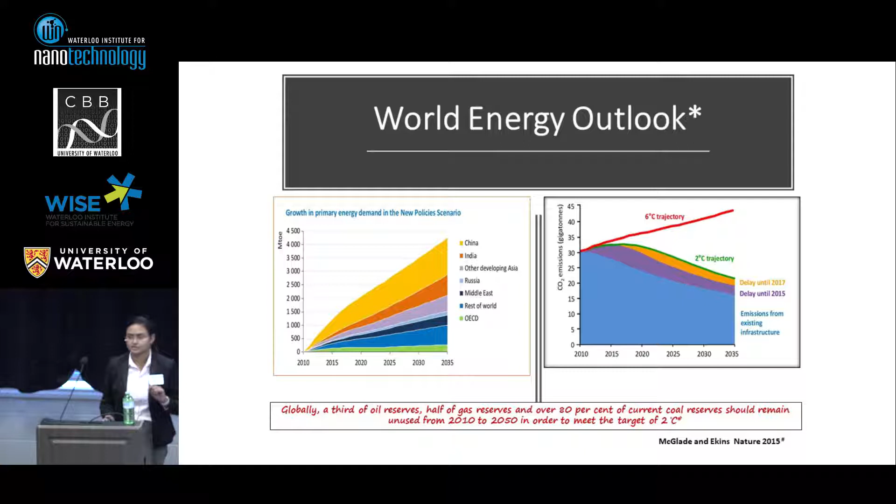And there's another trajectory which is 2 degrees Celsius, and if we follow that path, the Earth's temperature will increase by 2. But we already crossed that limit by 2017, and we're already on the trajectory of a 6 degree increase in global temperature. So considering those situations, we have high energy demand, CO2 emission, and waste generation, and all these 3 parameters are making the whole Earth so unsustainable. So to maintain environmental sustainability, we need 3 aspects.

One is renewable energy, zero carbon footprint, and the third one is to remediate our waste. All these things motivated me to work on the bioenergy process.

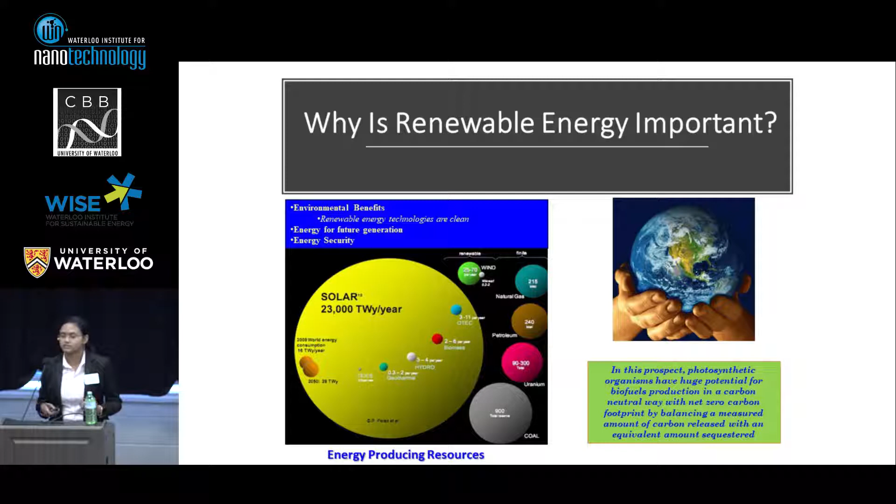If we look at all the energy available to the Earth's atmosphere, solar energy is vast in comparison to all renewable and non-renewable resources. Even if we stop using our coal reserves by 80% from now onwards, we still would not be able to meet the trajectory of only a 2 degree increment.

So why did I start my research with solar energy and photosynthesis? Because photosynthesis is the only process which brings energy to the biosphere, and this is the starting point.

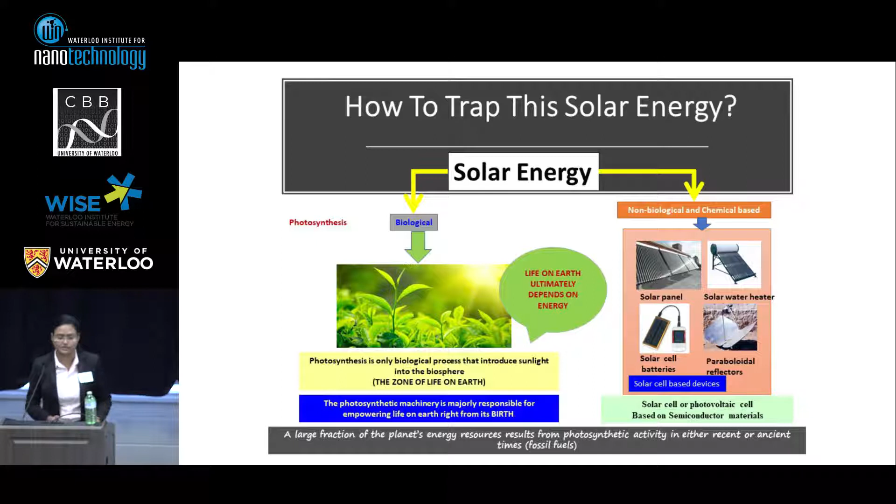Considering that point, I worked on three energy aspects: one is hydrogen production, second is bioelectricity generation, and third is biodiesel production from algal biocells, using energy from solar radiation, biomass, wastewater, and finally CO2 as a carbon source.

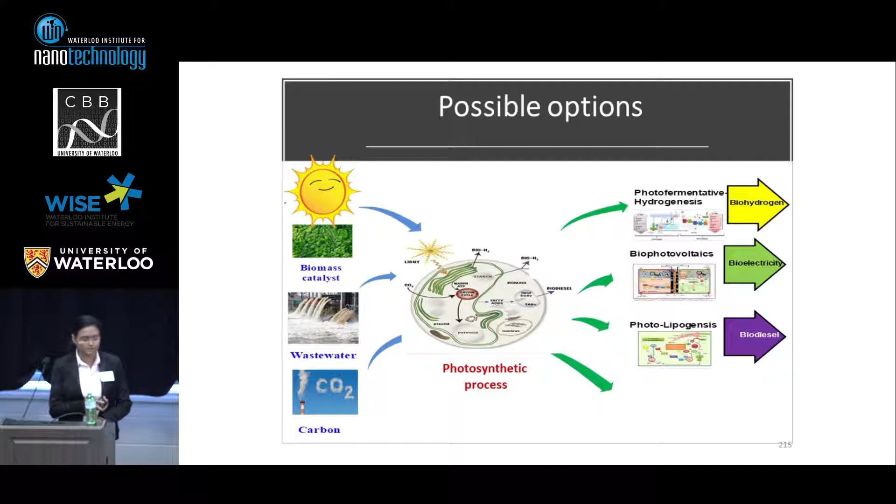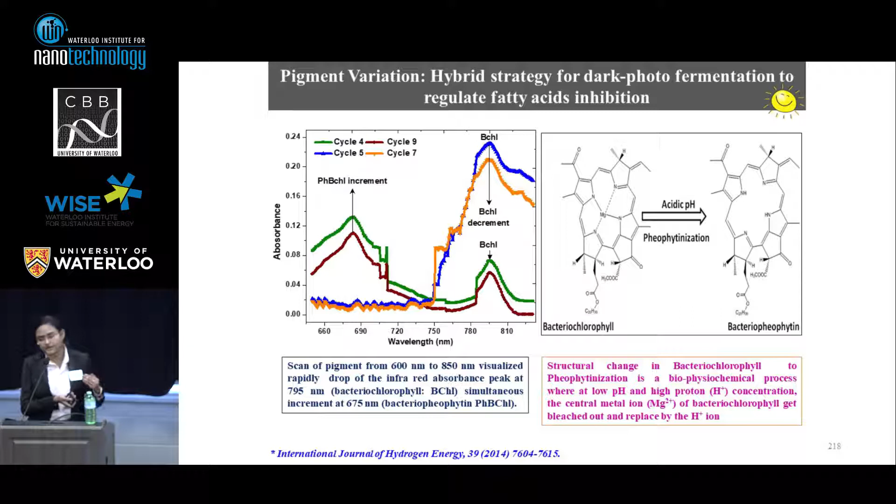We then found some issues, like hydrogen production was depleted, which was because of the pheophytinization of these photosynthetic pigments. We later recovered this by adding more photosynthetic bacteria, which was because of the acidification of these pigments — the metal ion at the center of these bacteriochlorophylls gets replaced by a hydrogen ion because of the acidity.

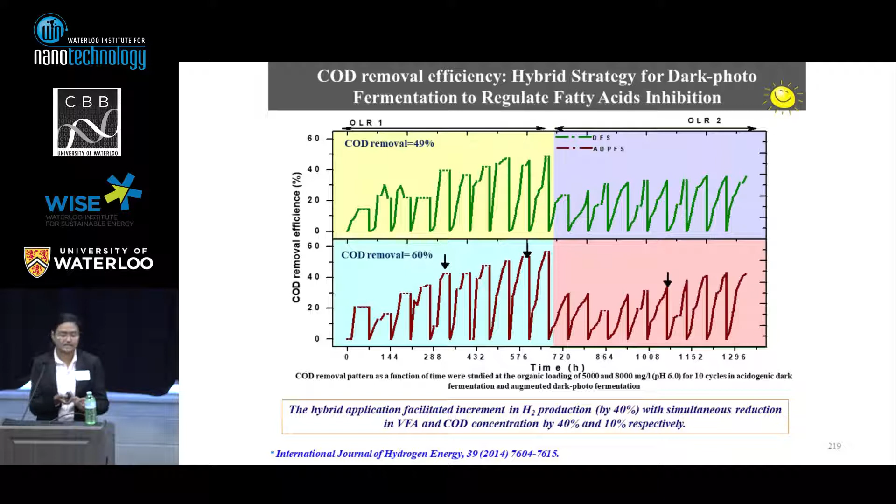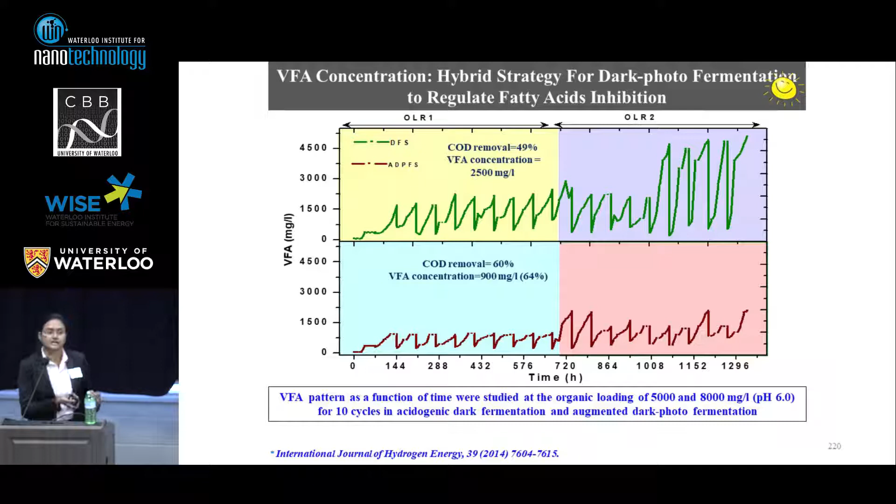We also looked at the COD removal efficiency, which was not enhanced that much — in the normal system it was 49%, and in the augmented system it was 60%. But when we looked at the VFA, volatile fatty acid concentration decreased to a higher extent, meaning the photosynthetic bacteria were utilizing these VFAs and producing more hydrogen.

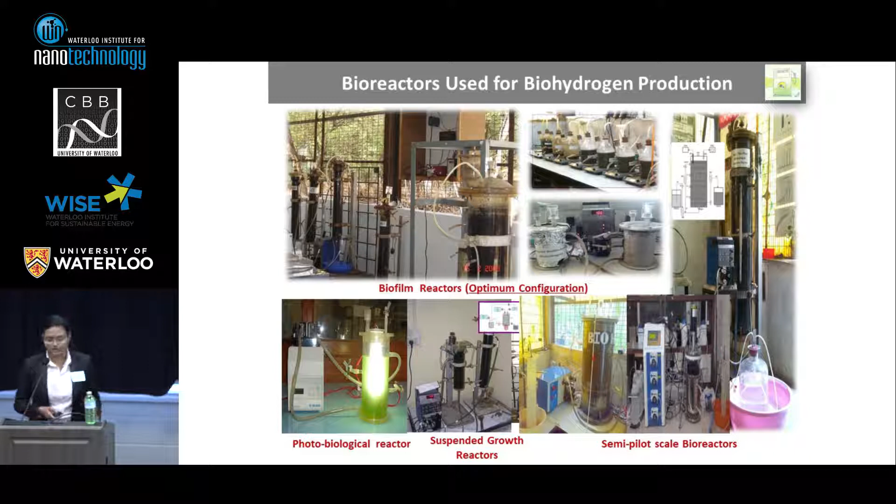These are the various reactors which I studied, starting from bench scale to semi-pilot scale. I want to show this reactor, which is the outcome of 10 years of study, where we established a pilot plant operation using food waste, already installed at CSIR-IICT.

It is a two-stage process: one is acidogenic fermentation followed by the methanogenic process, and third, we have an aerobic treatment plant where we treat the wastewater to a higher extent, integrated also with bioplastic production.

In the first part is the hydrogen reactor — first the equalization tank where we collect all the wastewater, then we send it to the hydrogen bioreactor at a pH of 6, which is the optimal pH for efficient hydrogen production. We collect the hydrogen and use CO2 scrubbers, basically KOH solutions, to isolate the hydrogen gas from the CO2.

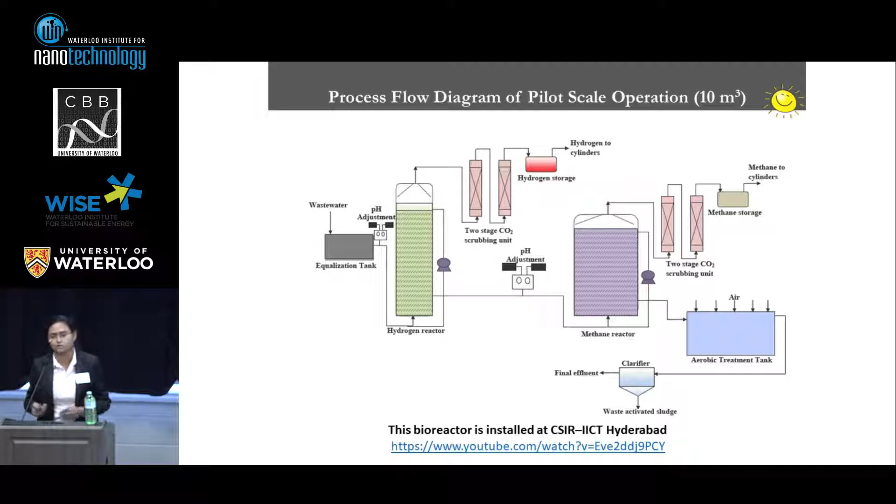We then pump the effluent to the methane producing bioreactors, where we recover methane and treat the wastewater further, before the whole wastewater goes to a settling tank for further treatment. This is a mature technology already installed.

My next setup was a photosynthetic microbial fuel cell operation. First I'll give a brief on how it works — there are two chambers, one is the anode and the other is the cathode.

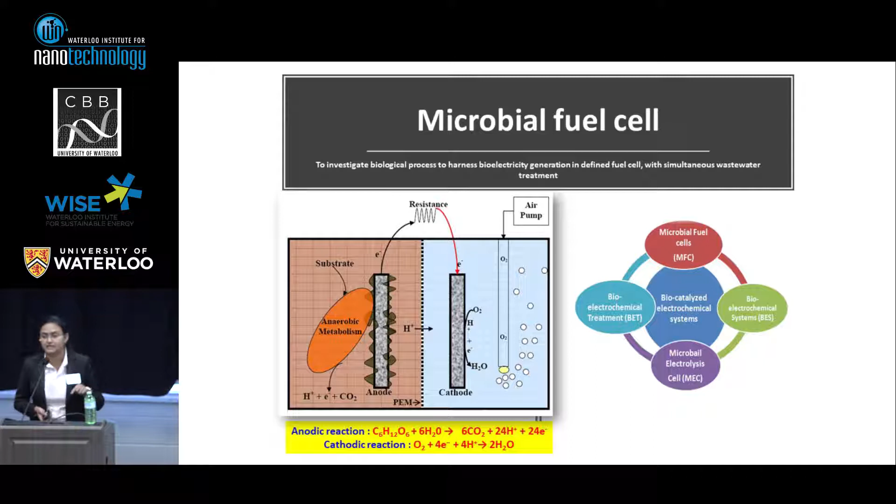In the anode, we put the wastewater, and in the cathode we pump in oxygen as a terminal electron acceptor. In the anodic chamber, there is a bacterial population which consumes all the organic content in the wastewater and converts it into electrons and protons. The electron gets captured by the electrode and the proton travels to the cathode through the proton exchange membrane, and during that process we build up a potential difference, which creates electricity.

This is a simple setup showing how a bench scale reactor looks. We worked on a sandwich model — the top is the cathode, the bottom is the anode, and in between the PEM is sandwiched.

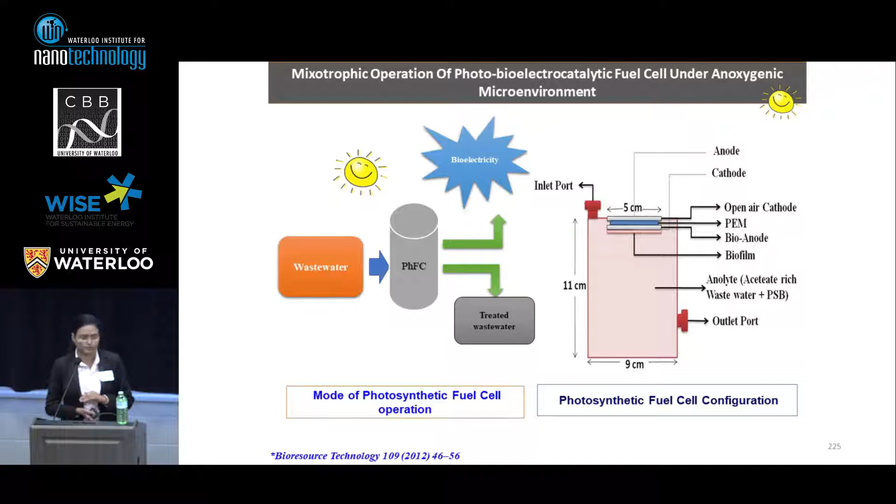This was the first study where we studied how the current and open circuit potentials were varying. This was in 2012 — now we have more sophisticated instruments to track it better. At that time, this study was one of the good things where we got a cover page for the Journal of Bioresource Technology.

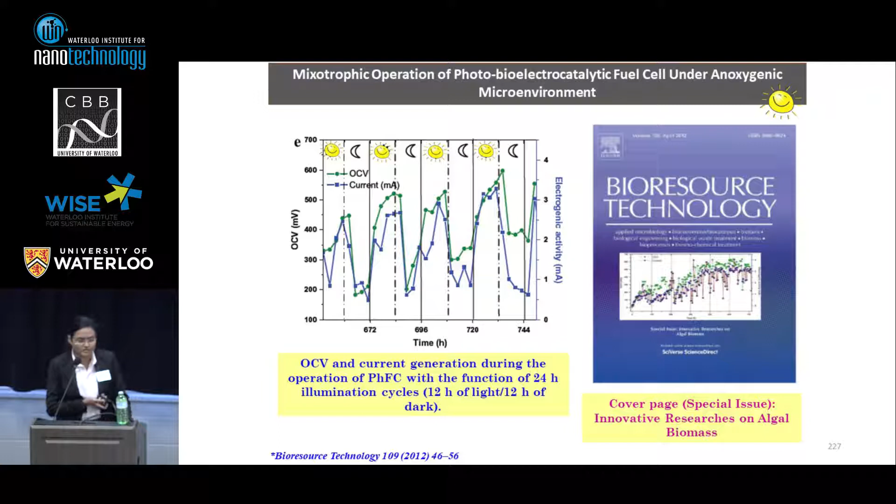We characterized the bacterial population present in the system, and found that Alphaproteobacteria was the major group, which is more responsible for bioelectricity production.

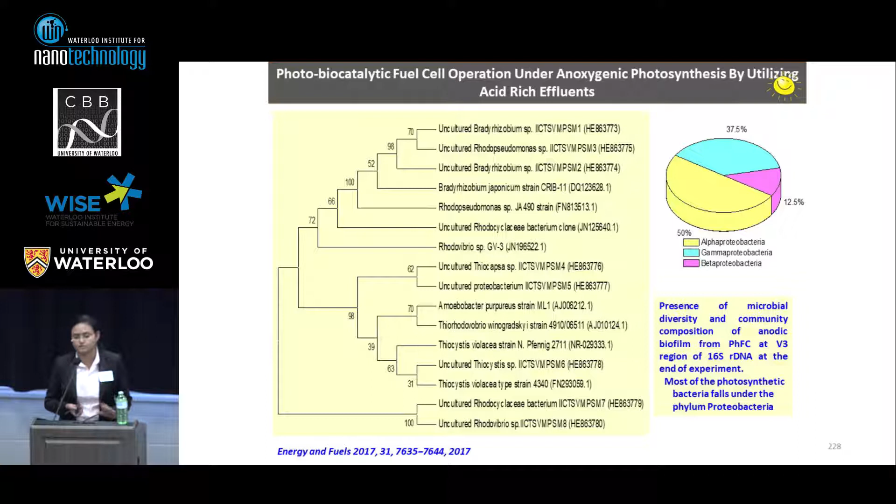These are the various reactors we worked with, starting from the double chambered reactor, which is very similar to the galvanic cell we studied in chemistry. We changed the anode chamber to a biological system where all the biological reactions happen, and with the help of electrodes, we capture these electrons and protons to produce bioelectricity.

Initially, we studied a double chamber, then we switched to a single chamber, and finally ended up with a pilot plant setup with anode and cathode chambers. It is a well-efficient system which can produce about 1 volt of electricity throughout.

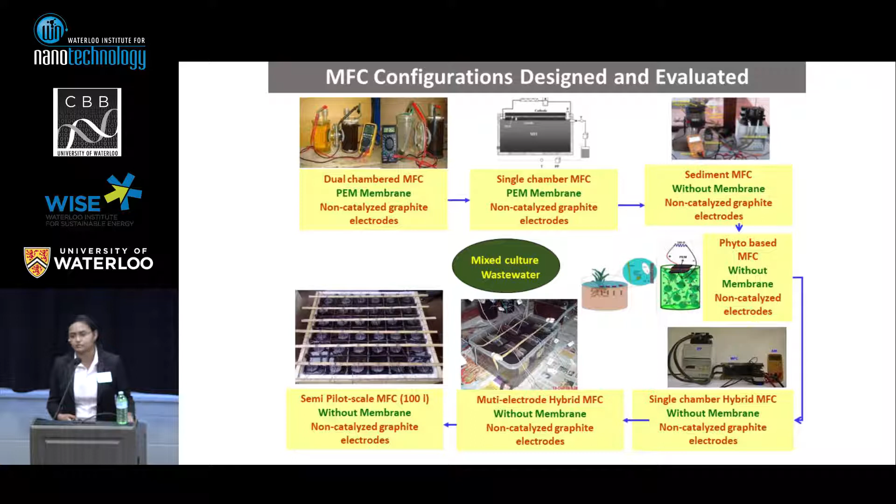Based on this, I moved on to figuring out how to make it more viable and available to everyone. We worked on plant microbial fuel cells where we use a potted plant, insert electrodes, and track how the bioelectricity generation is produced.

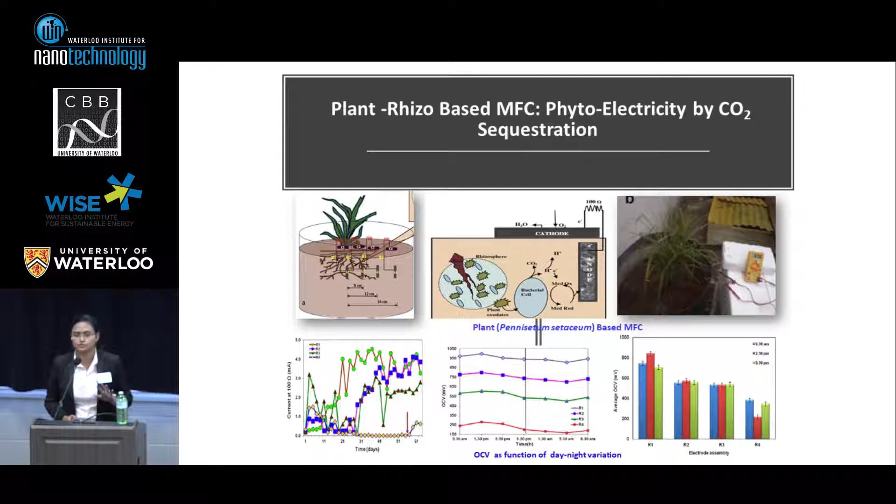These systems were efficient at showing bioelectricity production, but this system is one of my favorites - with it we can run a clock or a small device 24/7 without any external input, using just wastewater.

The first tank has a plant called Eichhornia, then hydrilla and some algae in successive tanks, and that's how we maintain a potential difference and produce electricity.

Initially, I designed the system like the first one with a sketch, but it ended up as the tank setup you can see. The system worked efficiently and was recognized by Akshay Urja, a magazine produced by MNRE, where this work was also highlighted.

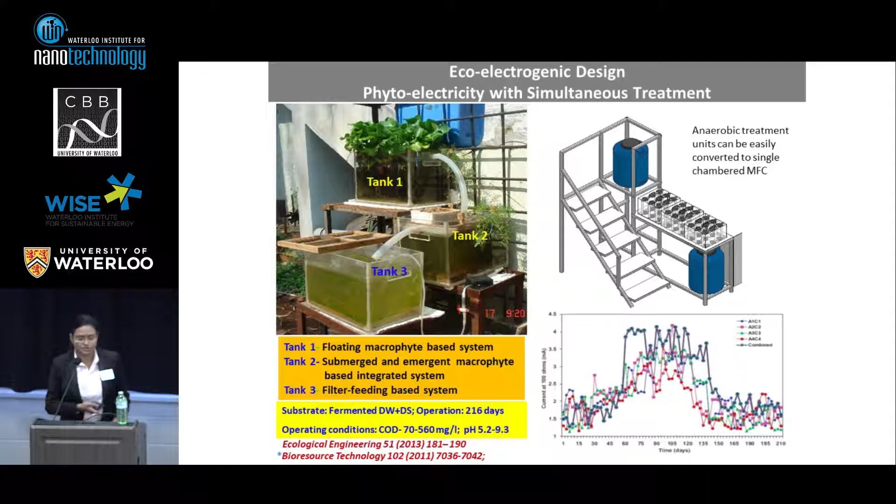So its productivity is less, I agree, but we are working on an integration strategy for how we can enhance biodiesel productivity from algal biomass.

I did this work with Arizona State University, where we worked on the extraction process to efficiently extract these kinds of fuels from algae. Here we did electrofermentation.

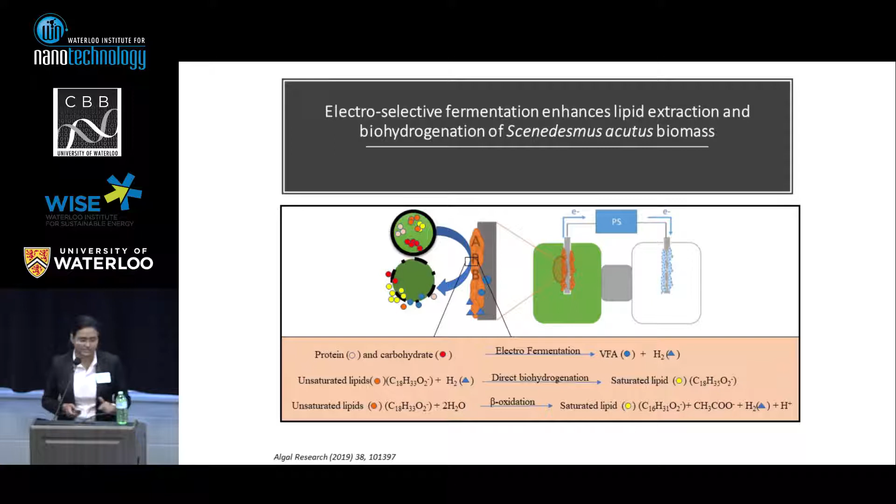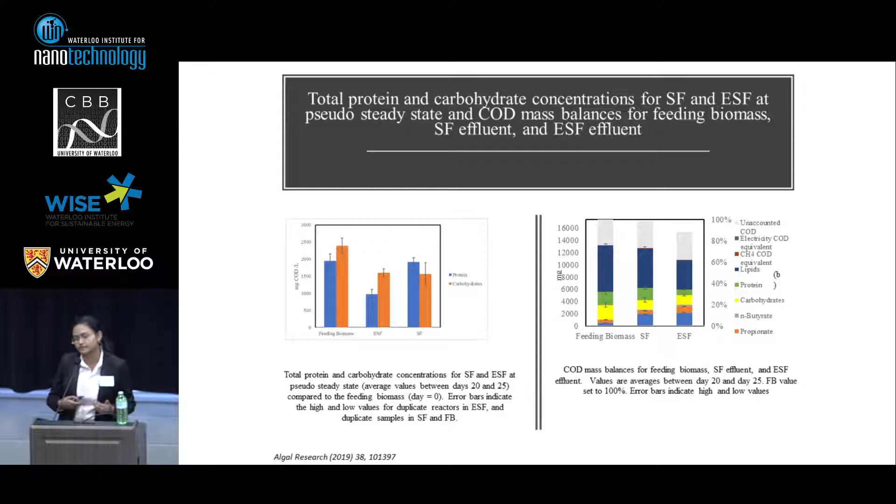What we did was try to convert unsaturated fatty acid to saturated fatty acid through these reactions - one is electrofermentation and one is direct biohydrogenation. Using these two strategies, we can enhance the fuel quality of algal biodiesel. This strategy worked, and through this process we can enhance efficiency by 5 to 10%.

This is the last part I want to discuss. The diesel we use right now, from somewhere around a million years ago or a thousand years ago, was deposited by algal cells, which we are now extracting out as petrochemicals.

So what if a similar kind of fatty acid composition could be produced by microalgae or organisms right now? For this work, I used cyclotella, a diatom. There is a hypothesis that diatoms are responsible for all the biodiesel - all the diesel we are extracting from petrochemical rocks.

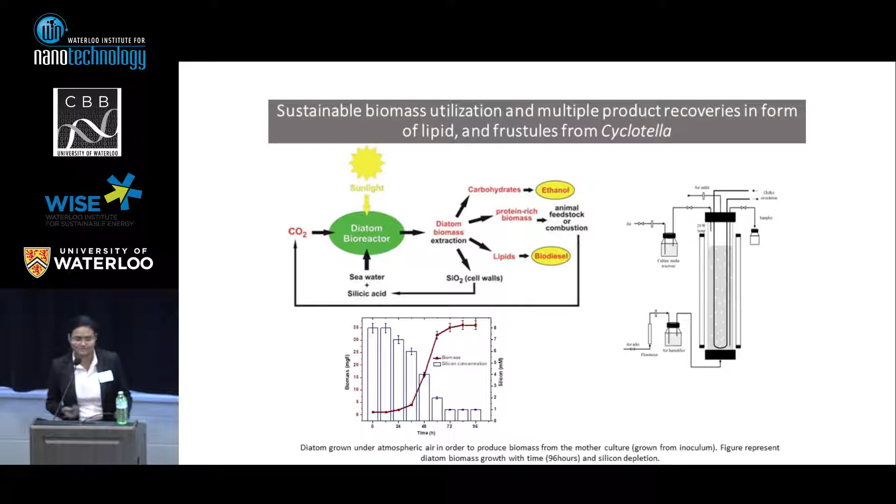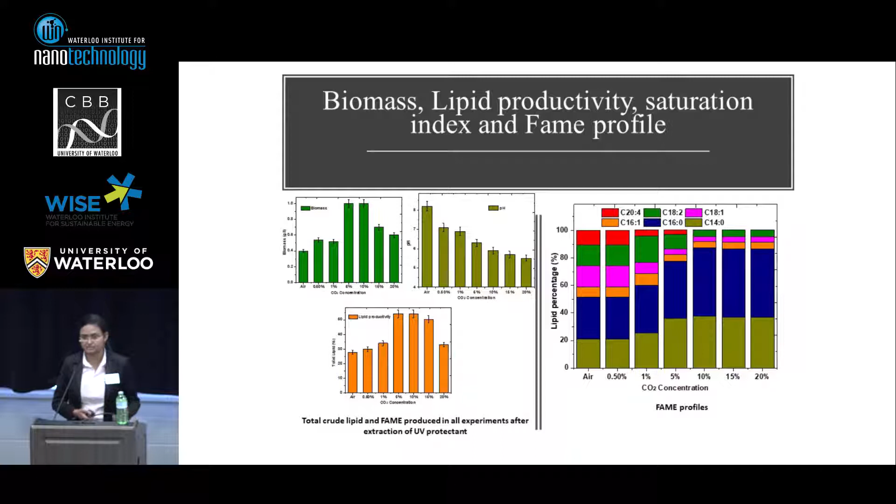I grew them in a defined media and checked the biodiesel composition. If you look at the FAME mix composition, it's exactly similar to the commercial diesel we're using. So my hypothesis is - instead of tackling any other microalgae like chlorella or scenedesmus, why not use diatoms as a source of diesel for the present scenario?

First I extracted the biodiesel, and then we ended up with frustules, which are the cytoskeleton of these microalgae. I characterized these cytoskeletons as well, and they are actually nanoparticles that we can use further as a drug delivery vector.

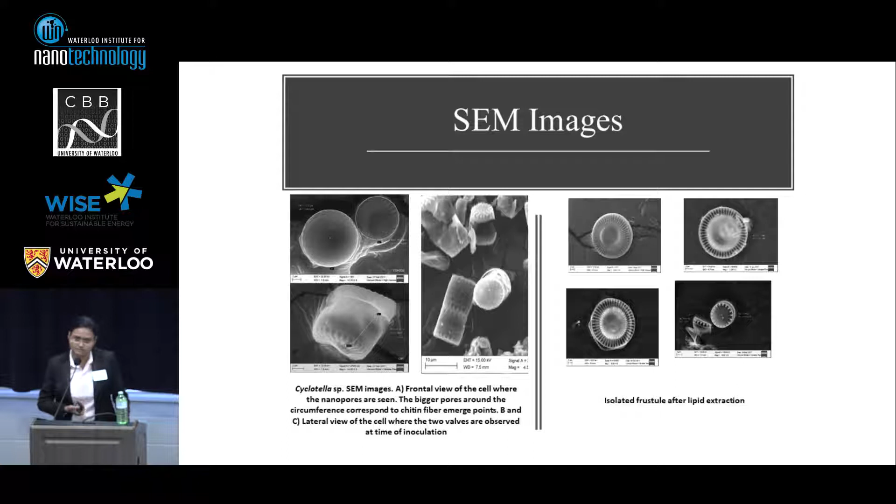I didn't work on the drug delivery itself, but I did synthesize this particle which can be further used. These are images of the cyclotella frustules, which can be used further.

At the end, I would like to conclude that a hybrid strategy works for biohydrogen production, and it works for microbial fuel cells too. If we integrate the whole process, and talk about sustainability, the integration is the only answer.

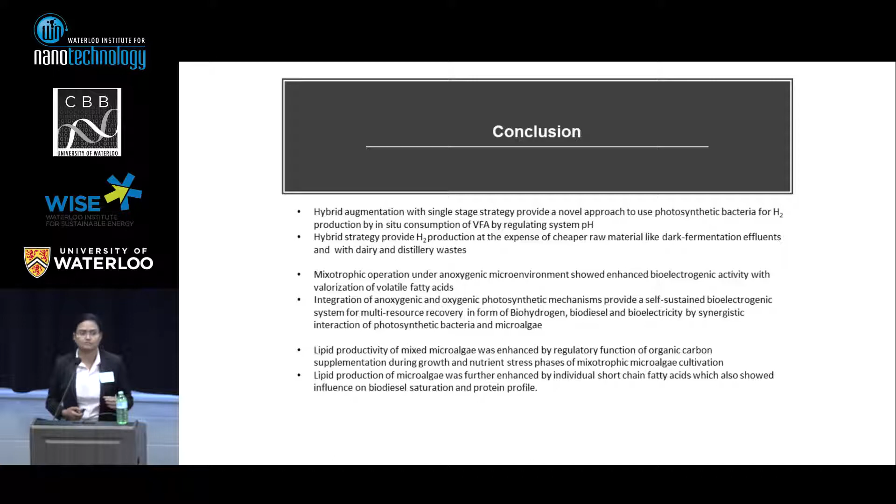If we are able to integrate multiple things like hydrogen, bioelectricity, and biodiesel in one platform, then we will have an answer, and we can give a solution that is sustainable.

At the end, I want to project this - we have been doing take, make, and dispose, and end up with waste. So leaving that approach behind, we should move toward a circular bioeconomy.

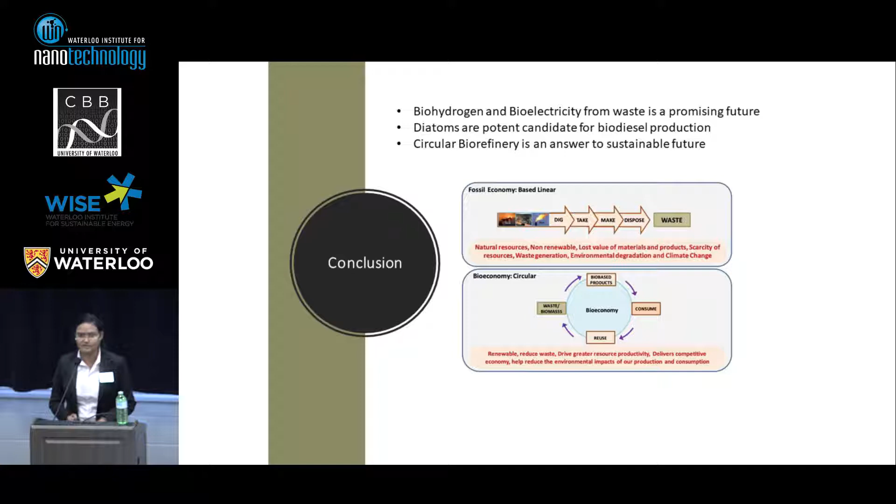Use the biomass wisely and get all the products we need efficiently. So thank you, and these are the diatoms - I love them, that's why I keep them.

I'm happy to tell you about this new project we're starting that has a number of different partners, but a major industry partner here is Fairlife. How many of you have heard of or tried Fairlife? Okay, we have at least one person, two people, three people.

Fairlife is new to the Canadian market, and they are a dairy producer. They make an interesting product by taking milk, separating it into 6 or 7 different fractions, and then putting them together in different compositions to make a healthier milk.

As a result, they have a huge amount of lactose waste. Lactose is a sugar that can be used by microbes to grow. We're interested in whether we can use that lactose sugar to have microbes produce bioplastics. Why bioplastics? For Fairlife, they're really interested in being able to make the packaging for their milk. I'll show you that in a minute.

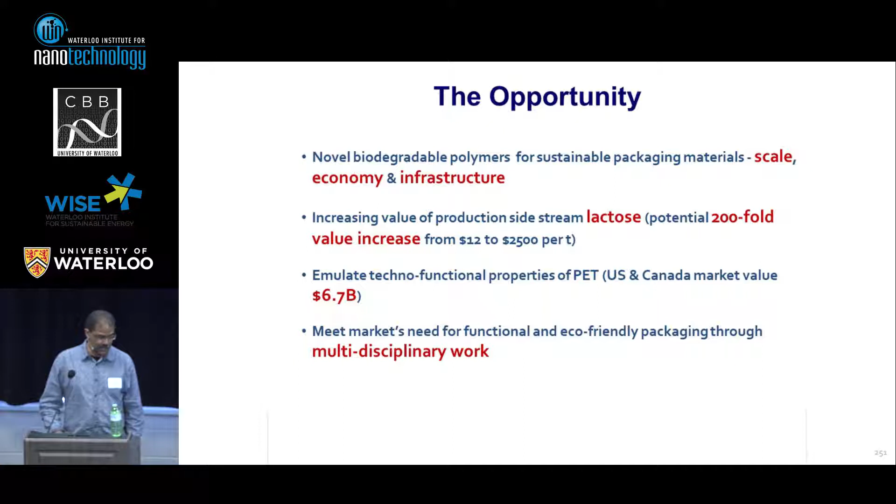The target plastic we are looking at is PET - this is what you see in a lot of bottles for different beverages. The nice thing here is that Fairlife happens to be a subsidiary of Coca-Cola. Coca-Cola is the largest beverage company in the world, so they have a lot of packaging requirements. This is sort of a pilot project for Coca-Cola.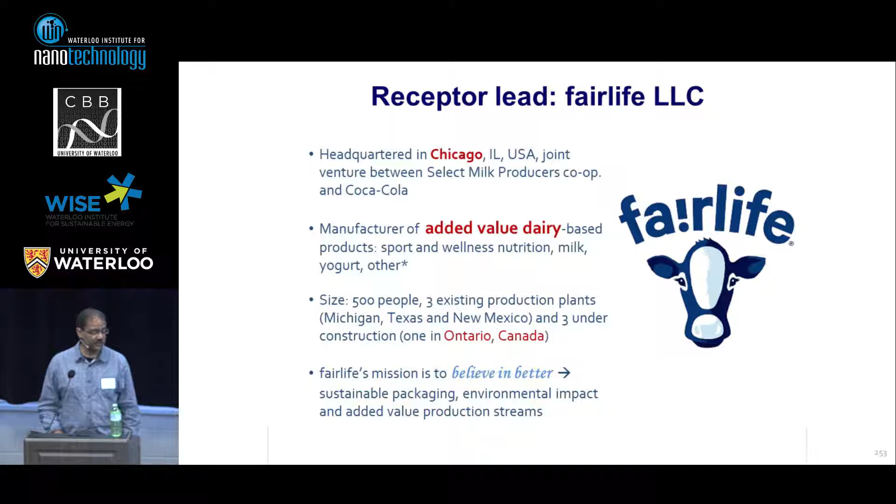So why is Fairlife in the Canadian market? It's very difficult for a US dairy company to enter the Canadian market. The reason is they are developing dairy production in Peterborough - building a plant there to produce their product. They've received a special dispensation to enter the Canadian market ahead of time as they build their plant and develop their market. So our vision is to have a facility to produce bioplastics associated with the new plant in Peterborough, where we go directly from the waste produced in that plant to bioplastic.

So what's going to help us get there? We have a couple of requirements. One is that we have to have the appropriate microbes to produce the plastics that will replace the type currently used by Fairlife. That's where the company Metagenome Bio comes in - they can do genome engineering to take bacterial strains that make a certain type of bioplastic and modify them so they make the plastic of interest, using lactose.

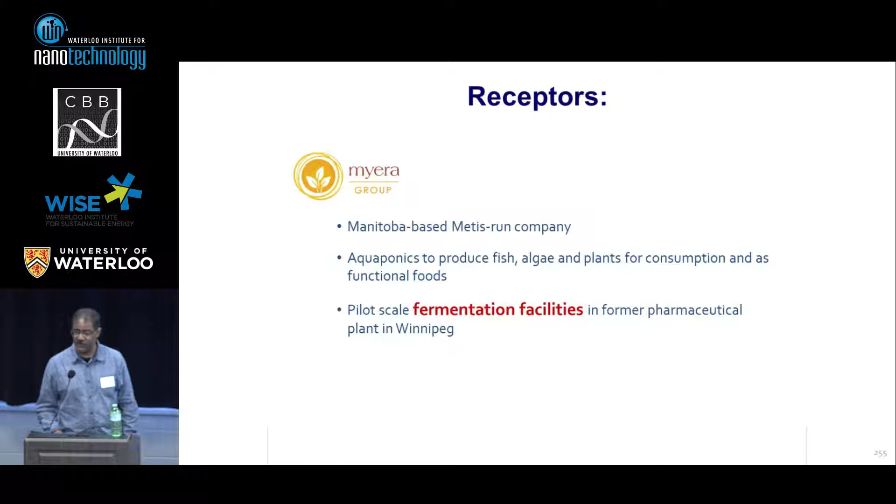The other one, Myera Group - they have acquired a pharmaceutical facility in Winnipeg. It used to be a CanGene facility that has extensive fermentation capability, up to 2,000 or 3,000 liters. So we can do all of our pilot work at that facility.

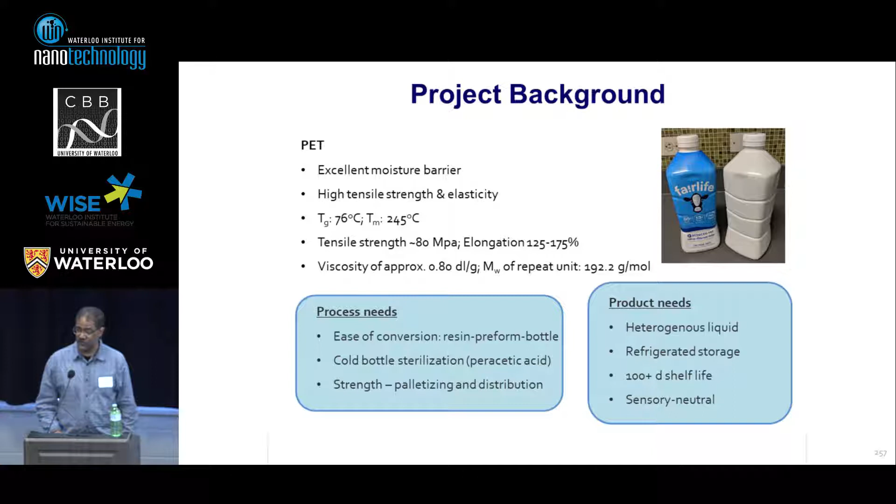So we're focusing on PET. There's the Fairlife bottle, and there are certain characteristics that the PET material has that make it ideal for their product. Our task is really to match those properties of the currently used plastic with our bioplastic. So how do we do that?

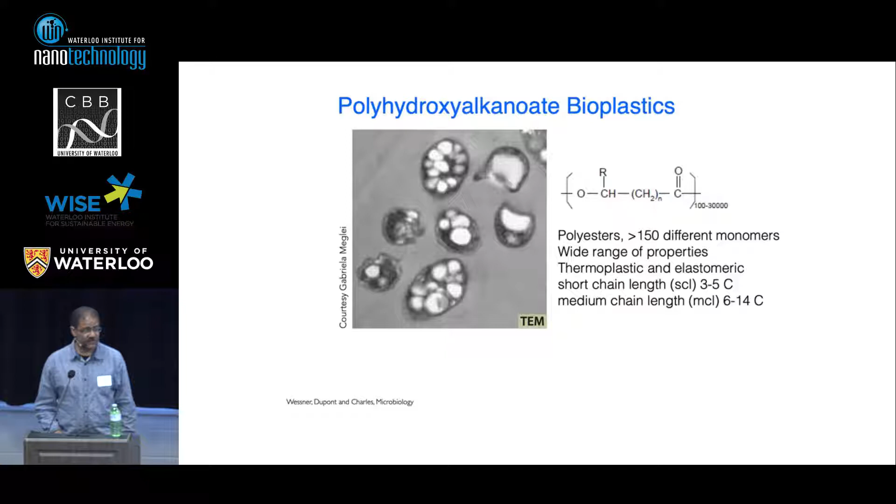We're able to do that using different types of Pseudomonas organisms, and also by introducing genetic material from outside of these particular organisms. We like to use genetic material that's isolated directly from soils or wastewaters - anywhere you might find a diverse microbial community with diverse genetics.

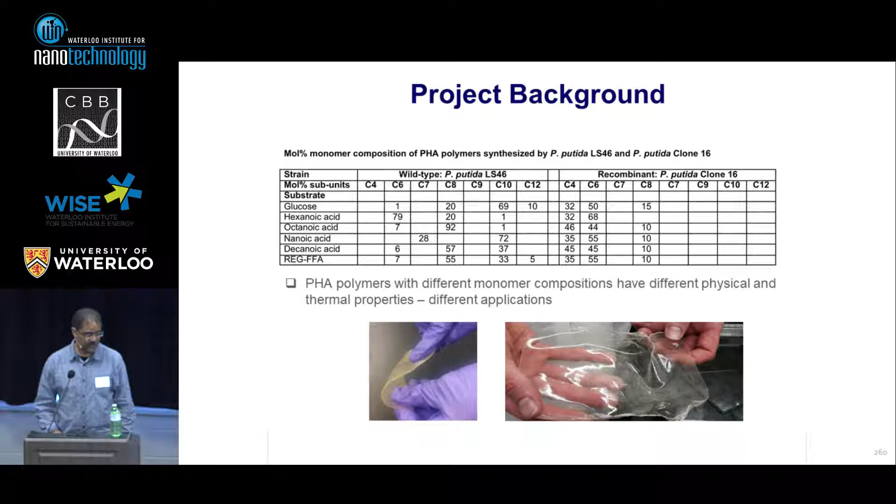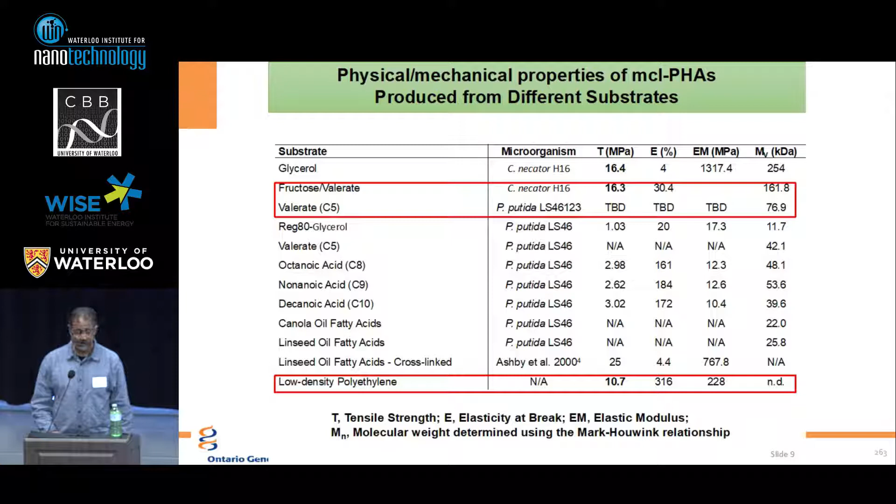So here you can see some of the plastics we've been able to produce and test in our initial experiments. It depends on how you actually culture these organisms, what you give them to feed on - that will determine the properties. This just shows some of the physical and mechanical properties of these particular PHAs produced using different substrates.

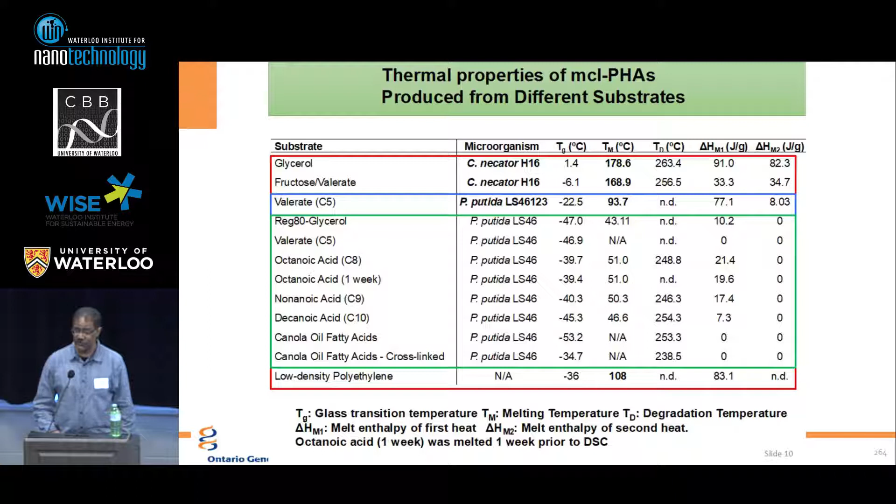And of course, thermal properties are very important to match up as well. I'm not going to go through these details - the take-home message is that there's a lot of variation in the properties we can match up to the commercially used, petrochemically derived plastics. So we need to define the targets.

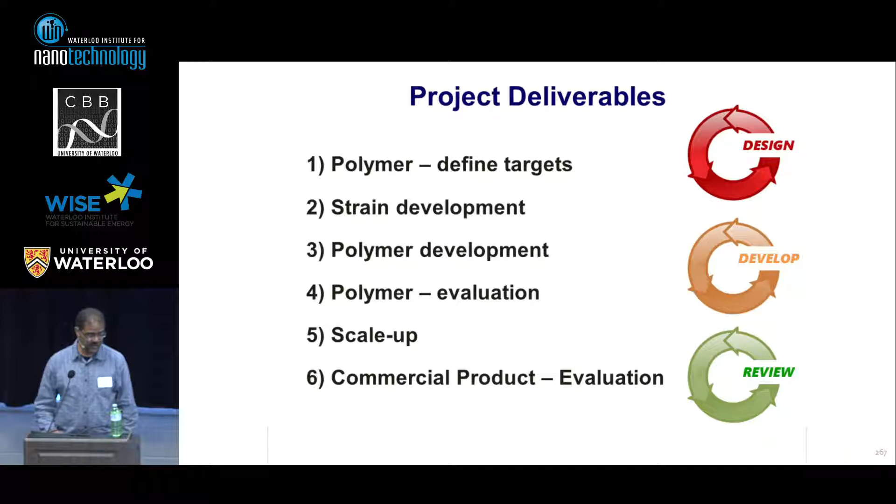In this case, the target is the PET bottle. We need to develop the strains genetically, develop the polymers, evaluate them, then scale up at the Myera plant in Winnipeg, and eventually get to commercial production. Luckily, we have a lot of capable partners. Phase one, where we're at right now, is basically the production and evaluation of those polymers. We'll move to pilot scale, commercial demonstration, and then hopefully everything will move towards a commercial facility.

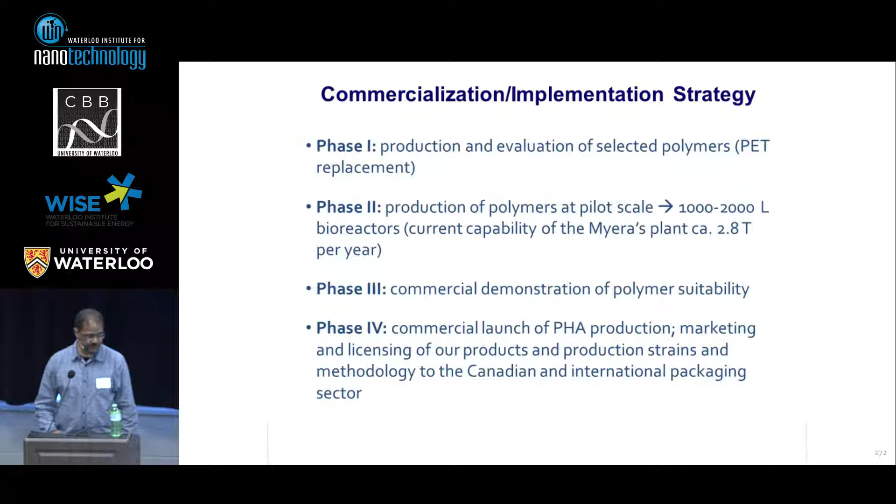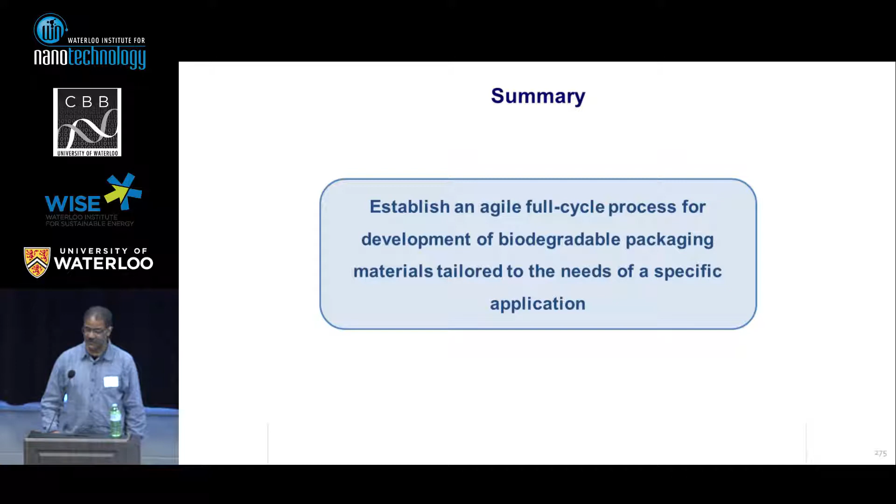So in summary, our goal is to establish an agile, full-cycle process for development of biodegradable packaging materials tailored to the needs of a specific application - the Fairlife bottle. Thank you.

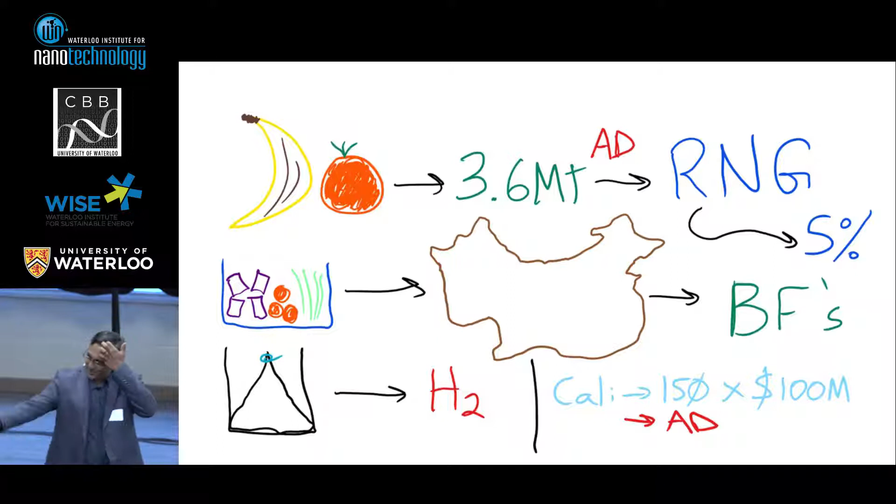Yes, but which country? It's not Canada, not that bad. It's China, okay? So it is China. Thank you, I owe you money. I won't give it to you, but I owe you.

So China - really interesting, the waste management industry. I hate this term waste management, I don't even know what it means anymore. It's a biomass industry, a resource industry. All this stuff we send to disposal has energy - a phenomenal amount of energy that we entomb in holes in the ground and bury. I don't know why we missed that opportunity.

I'll give you one really good example. Chris Ford, who was here this morning with operations for the University of Waterloo, said something interesting. He said natural gas is my number one consumable and my biggest emission. He said, well, I can't produce it myself because I don't have a natural gas well at Waterloo that I can take gas from. And I said, well, I think you do have a natural gas well, because the University of Waterloo, with this many students, produces a lot of organic waste. Why don't you take that waste, process it in a simple technology, and produce your own gas to offset this massive energy and carbon signature you're so concerned about?

These are solutions that are sort of coming. So when I look at this box, this blue box, there's all kinds of stuff in it.

Now, the reason I put China up is because China has done something over the last couple of years that you've probably seen on the CBC - waste is very topical these days. China said, look, all this blue box stuff, a whole bunch of it used to just go to China, and the reason it went there is because no one here developed a recycling industry. So we have recycling, but we don't have an industry. There's nowhere in North America, for the most part, to take that product and turn it into something new to replace virgin product. It really doesn't exist.

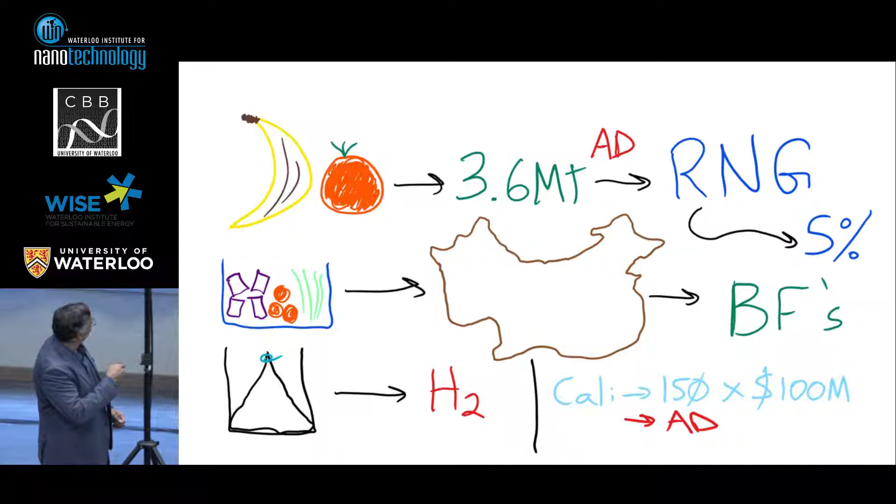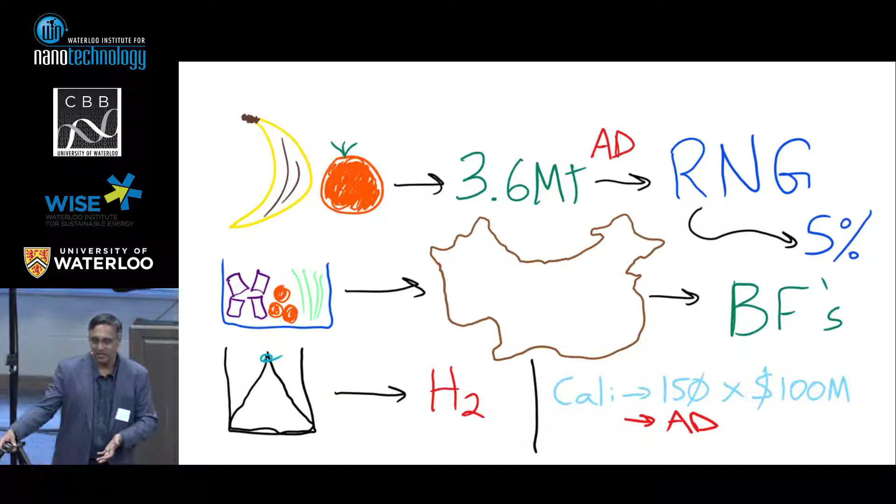This thing here, I won't even ask you if you can tell what that is, but that's a garbage can with a garbage bag in it. That's the third thing you curb. You put out your green bin with organics, your blue bin, and then you have garbage. So what do you do with the garbage? What is the last piece?

The piece that's not organic, that's not recyclable, but still has appreciable energy value. A lot of what we talk about for that is hydrogen, and I'm exceptionally interested in Rashmi's presentation on biohydrogen. We're actually doing some work with one of Rashmi's colleagues and with Trevor on the conversion here at the University of Waterloo of organic waste directly into hydrogen.

It's not hard for us to take organic waste and turn it into methane. That happens naturally. And I could take a methane molecule, one carbon, four hydrogen, and steam reform it into the hydrogen product we want in the system. But there's a lot of inefficiencies in those steps. What if we bypassed those inefficiencies and found a way to take this organic waste and directly turn it into hydrogen that we could then use for fueling?

Hydrogen was mentioned today, but not a lot. I'm exceptionally interested in hydrogen. When you put hydrogen through a fuel cell, you have no carbon dioxide emission, biogenic or non-biogenic. You have none. It is a very, very carbon efficient fuel.

Question is, where are you going to use it? Well, the chemical industry in Sarnia uses exceptional amounts of hydrogen, but the other player that's going to push this, and we've talked today about fuel cell vehicles, is car manufacturers like Toyota. Toyota is deploying fuel cell vehicles. They will do it. They've already done it in Japan. They run cars on hydrogen. They want to be here, in North America. They want to sell their product here.

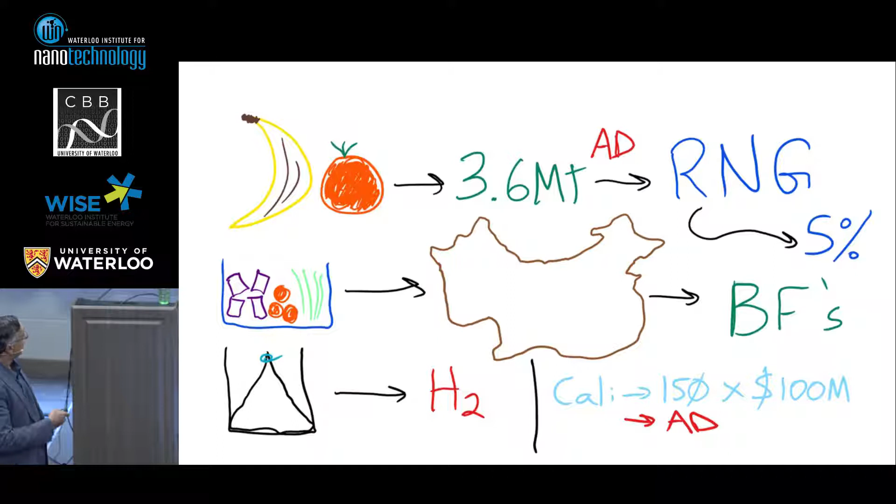Just a quick note on economics. I work for a private firm, so we're profit-driven, honestly, but I don't think there's anything wrong with doing good things for the environment and making money. I think those two things are mutually compatible.

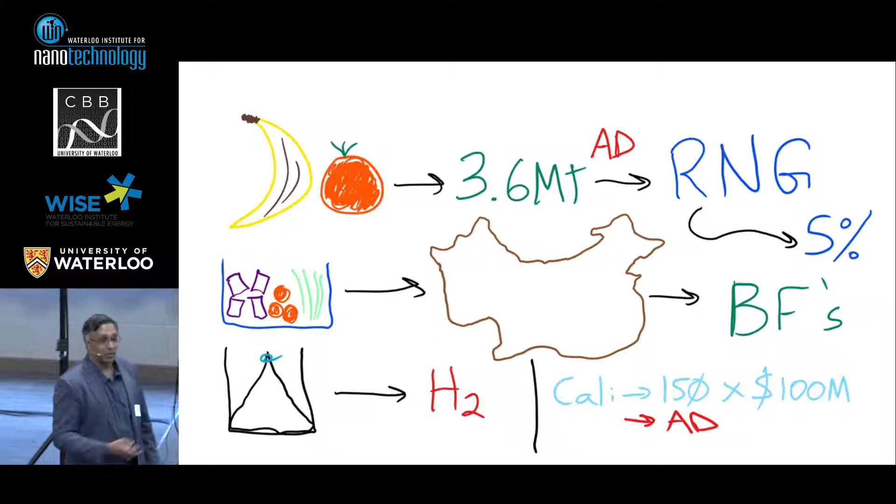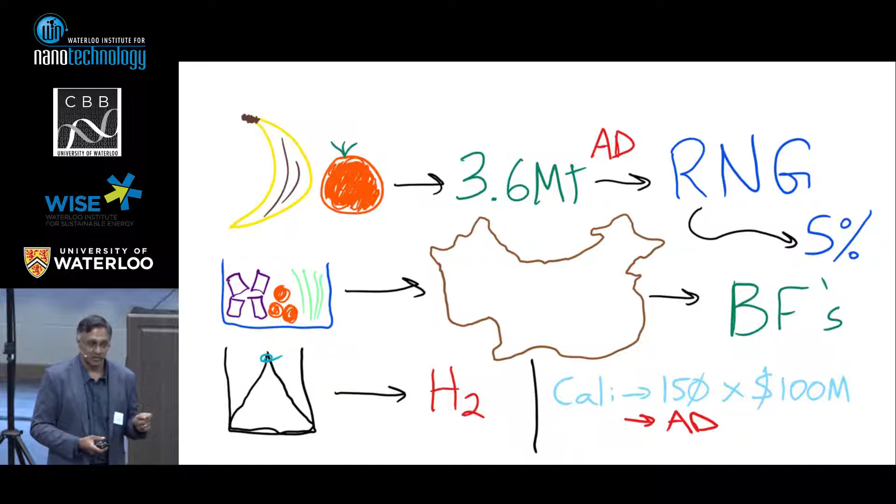California is a place where I work. I spend time there, and I have an office in California and staff. California introduced a regulation two years ago to ban organic food waste from going into their landfills. That's a 40 million person market. California is bigger than Canada. Their GDP is $2.65 trillion. Ours is $1.5 trillion. They're far bigger than us.

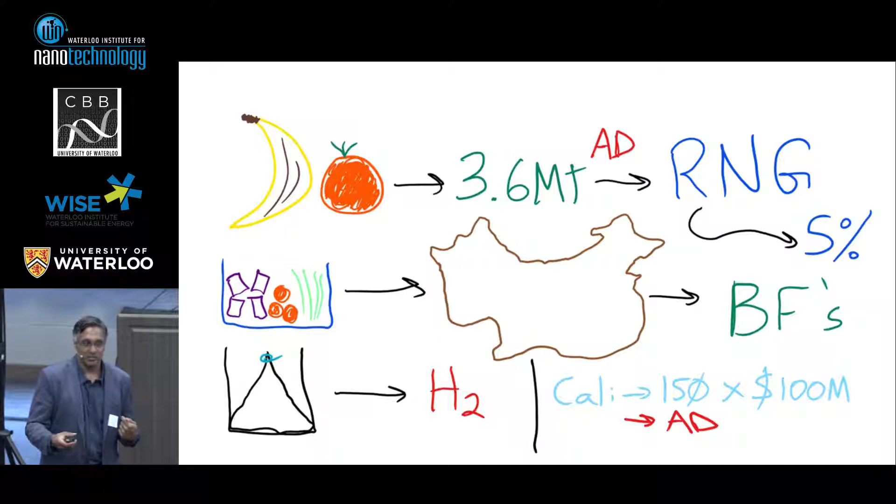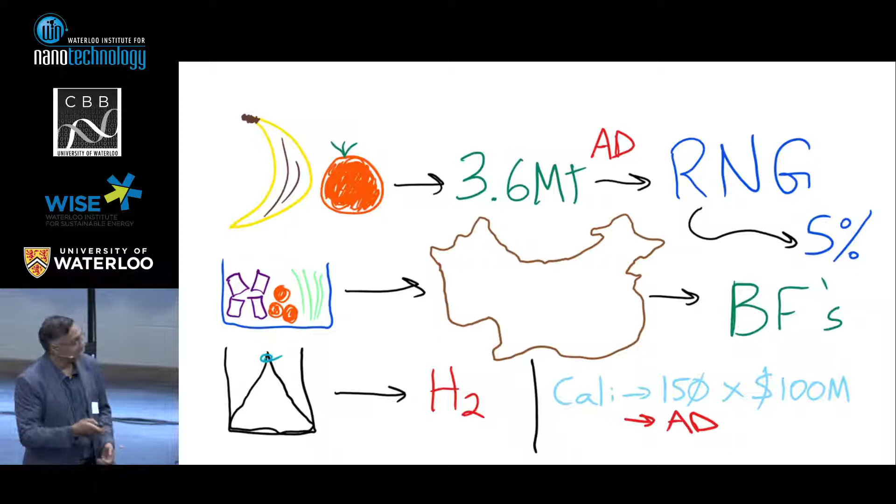A 40 million person market banned organic waste from going into landfill, but all they have is landfills, so now they need to build infrastructure. They need to separate this material, process it, turn it into something. It's an incredibly vigorous market. Our estimate is they need about 150 new facilities, and each one of those facilities costs about $100 million to build, let alone to operate.

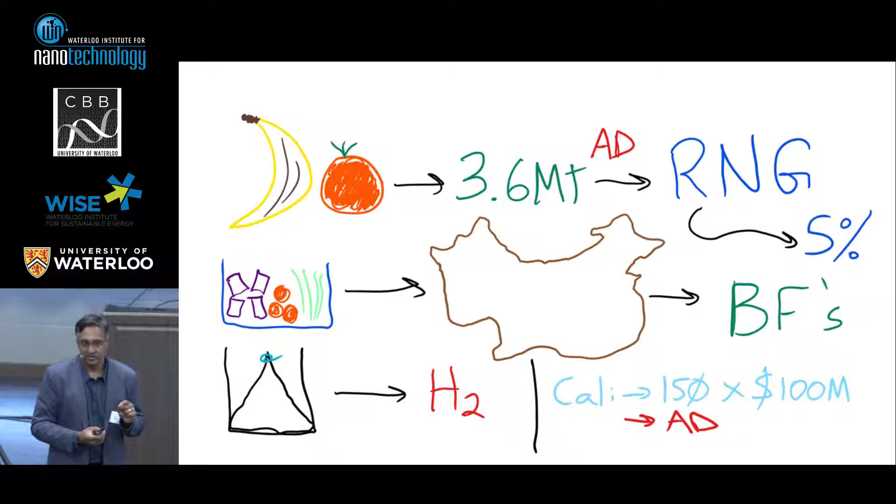You multiply those numbers and start adding a lot of zeros. It just gives you an idea of the size of this bioenergy market for just one state in one part of the United States. It's a massive area. It keeps a lot of us in the consulting world very busy and actively engaged in finding solutions.

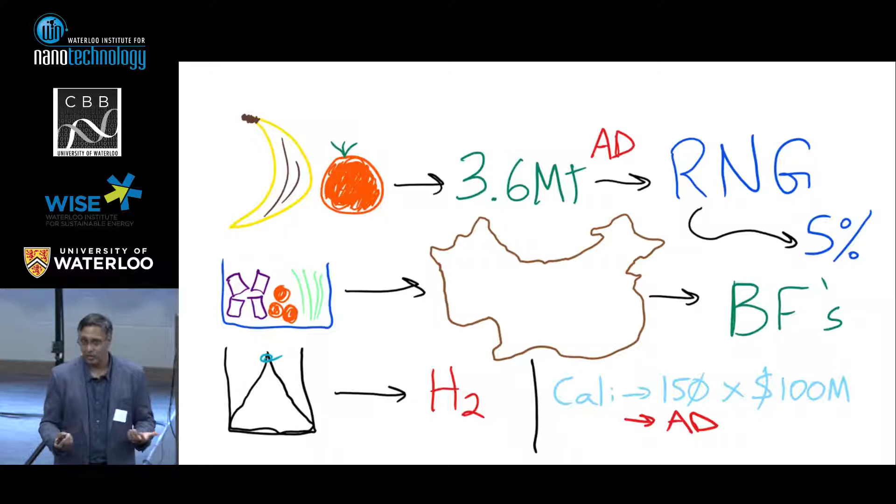Anaerobic digestion has been around, well, probably millions of years. It's a natural process that produces biogas. I'm interested in the production of higher value-added fuels like hydrogen or ethanol or all these other products that require a little bit more time and effort to actually produce.

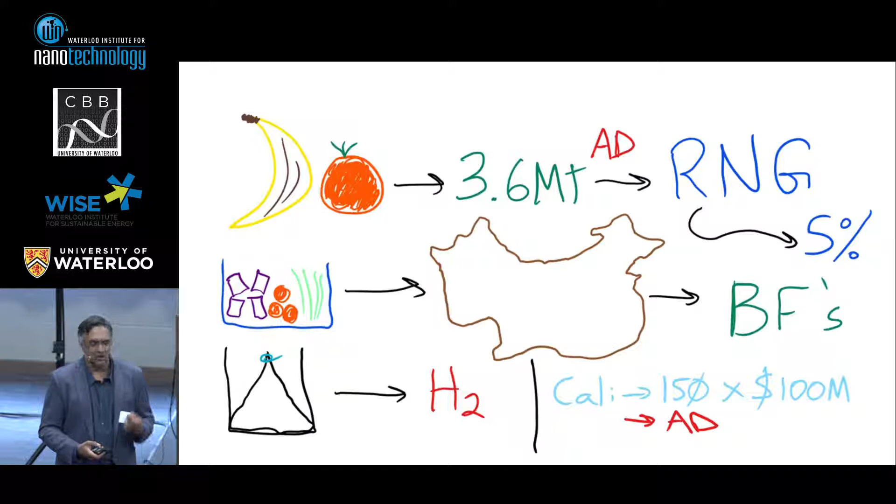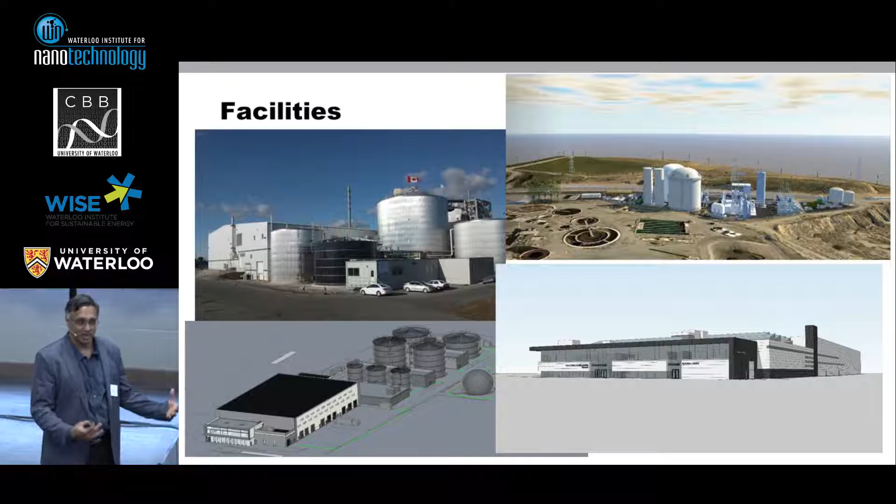And with that, I will conclude with my last funny cartoon - I love this cartoon. Thank you.

I understand that we are running behind schedule, so I'm going to keep my talk short. Right? But 5 minutes is probably too short.

Okay, so bioenergy - we understand bioenergy is green, but is bioenergy clean? So I'm going to focus on the second keyword, clean, right? And myself, I'm from mechanical and mechatronics engineering, so a little bit far from biology and chemical engineering.

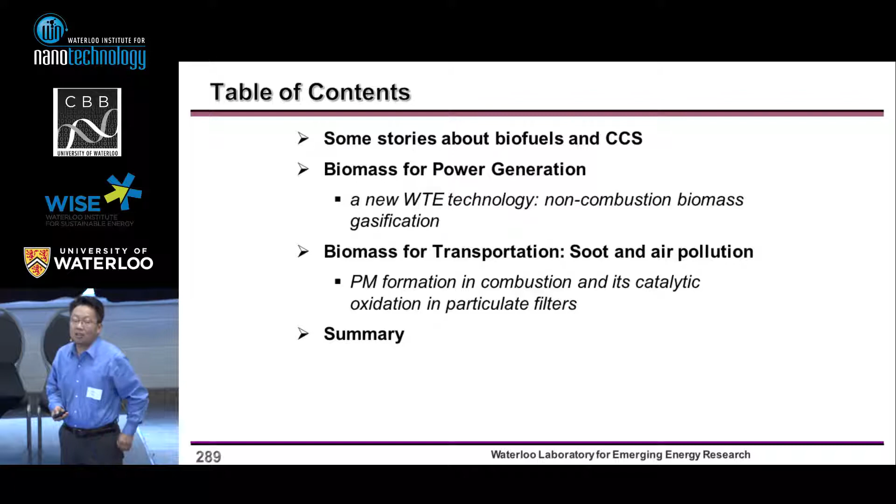Well, so yeah, I'll skip lots of slides, but hopefully I can get my major point across. So that's kind of my research - we're looking at alternative fuels, and we have some combustion-based methods in order to convert bioenergy to either power or heat. And then we have some energy management and control projects in order to more effectively utilize bio and renewable energy.

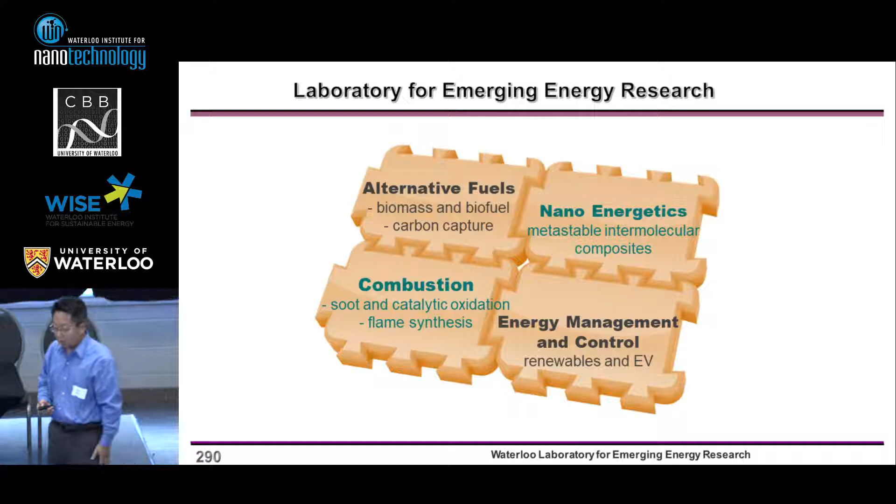So that's basically the story I want to talk about. There are two discontinued major networks of centers of excellence, and I was involved in both of them. However, they are now discontinued.

One is called Biofuel Net, and the colleague here, Professor David Levin from Manitoba, and myself, we worked in the same team for Biofuel Net Canada, and the other one called Carbon Management Canada. Those are very good, great networks of centers of excellence. However, they couldn't get the renewal from the government. So the question behind that is why, right?

Those are excellent groups of researchers, we produced lots of HQPs, we published lots of papers, but we couldn't survive. So what's the problem? That's Biofuel Net and Carbon Management Canada. I just want to bring this question to you, to understand why we cannot survive somehow.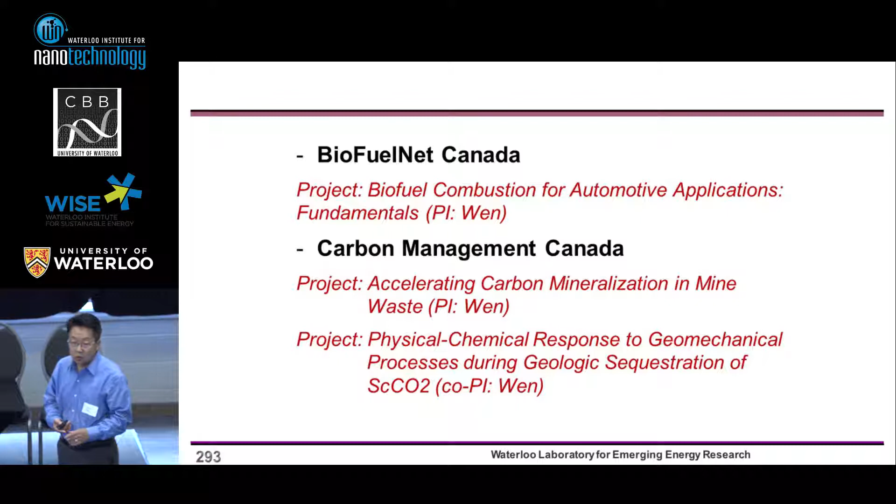For those two different networks, we have a project called Biofuel Combustion for Automotive Applications: Fundamentals. Obviously, we can use biofuels, biodiesels for cars, right? And for carbon management, we can either capture CO2 or sequester the CO2 underground. So those are basically the two other projects involved.

So then the question is this: really, the big fact is that everybody believes we can get electricity freely, that means by solar or wind, for free. And free electricity can power everything. Wow. So everybody has some certain degree of trust in this fact, right?

So then why hydrogen? Well, hydrogen fuel cells are also very hot, because somehow you can convert electricity to hydrogen, then you can store hydrogen, manage hydrogen, then use it. That's okay, hydrogen is okay. Then why bioenergy?

Bioenergy, we can use biomass for power generation. That's okay, but you have to compete with solar, wind, and nuclear. Are you still green enough or clean enough? Or cost effective, right? Or for transportation, then you have to compete with batteries, hydrogen fuel cells, even some natural gas fueled vehicles, right? So then what's the real value of bioenergy?

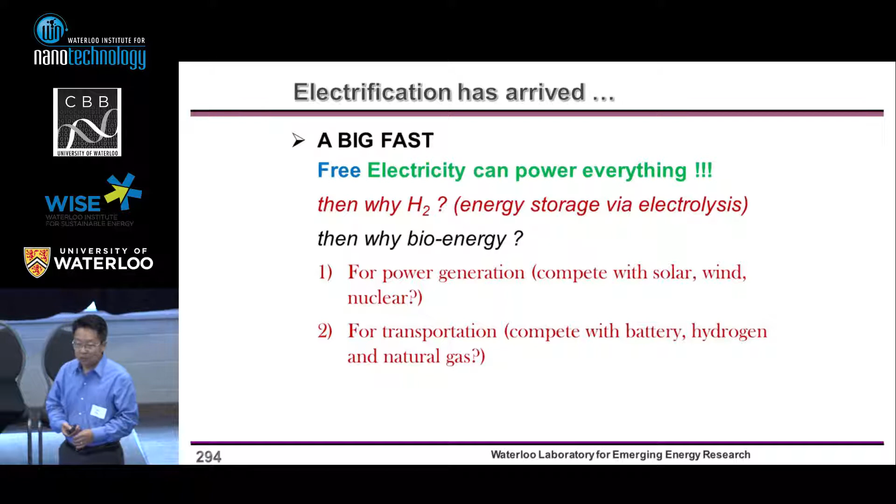So those are questions, but of course I have an answer. Bioenergy is good. For power generation, we don't want to compete with large-scale solar, wind, nuclear, large-scale power production, but for some specific regions, geological regions, under some specific situations, biomass is very efficient to convert fuel energy to heat and power, right? So I'm going to give you an example.

Then for transportation, biofuel is still a fuel. I don't treat battery as a fuel, or hydrogen either, because they are kind of secondary energy carriers, not primary energy. Right? Biofuel is a fuel. So liquid fuel, of course, has lots of advantages over other fuels.

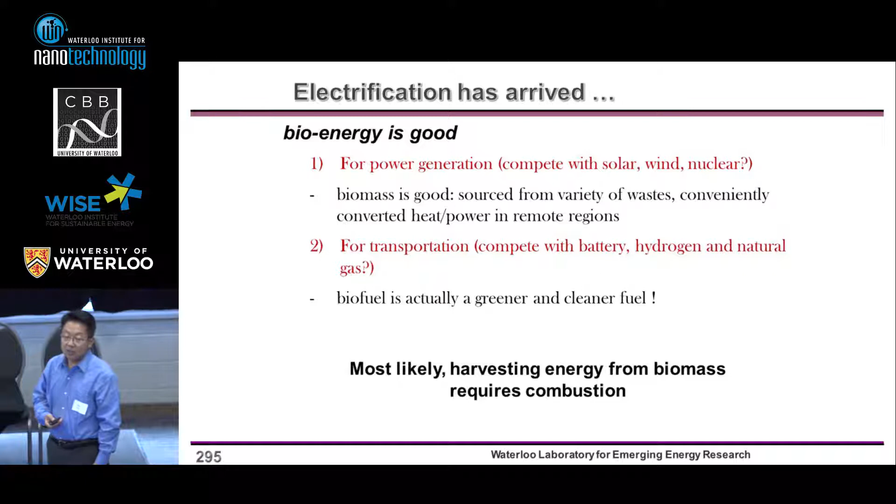So most likely, in order to use energy from biomass, we need combustion. That's my research background, right? So if you have biodiesel from a very efficient, cost-effective, and advanced technology, you still need to use it, normally using a combustion-based energy conversion system in order to get energy out, right? Okay, so then if you have combustion, the biggest problem is smoke or other combustion air pollutants.

So then how can you deal with that? That's kind of most of the smoke actually comes from transportation, right? So combustion needs to be more efficient and produce less pollutants, including soot particles, like carbon particles, and also NOx and SOx. So there's still combustion research highly related to bioenergy utilization, right? So that's the first topic I want to introduce today.

So basically, there is a new technology for biomass gasification, but it's not combustion-based. For conventional gasification technology, you basically use combustion to produce heat, then use part of that heat to gasify your biomass. So because of combustion, you're going to have lots of byproducts of combustion in your produced gas, so you don't have high purity produced gas. But this technology gets rid of combustion.

So they directly use heat produced by some heat carrier balls, heat carrier material. You can use either electricity or waste heat to provide the high temperature to heat up these heat carrier balls, then the heat is transferred from the heat carriers to the biomass. So then you can have a very well-controlled gasification process, producing a high purity produced gas. It's good for either power generation or you can use an FT process to produce liquid fuel, right? So that's one technology.

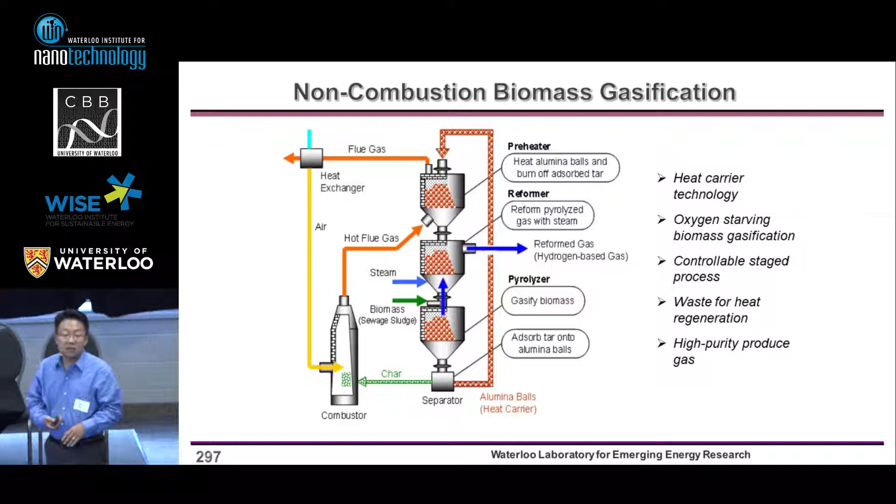So we kind of separate the combustion from gasification. That's a technology we co-developed with an industry partner. I'm going to skip this. We model the entire process in order to optimize the operating conditions. That's kind of an example about how to model just one gasification section, so you need different reactors to look at the energy and mass balance.

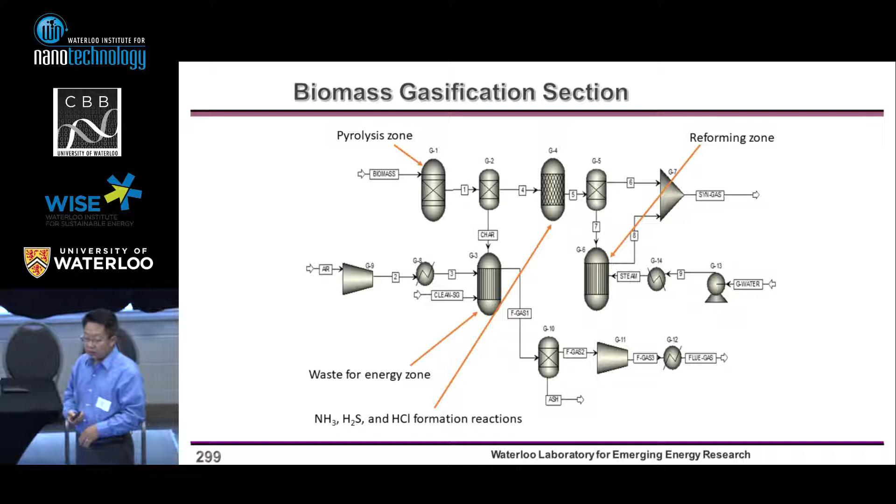So we look at 6 locations in Ontario and Alberta, and look at what's the quality and energy content of biomass at these 6 locations. Then we do the study.

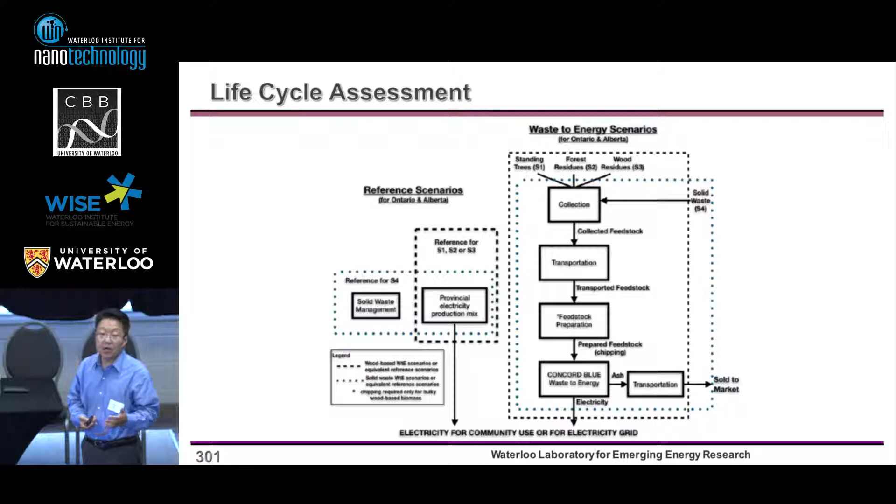Basically we compare the life cycle energy and environmental costs. So you have material collection, transportation, then waste to energy, biomass gasifier, then produce electricity. So that's the whole study.

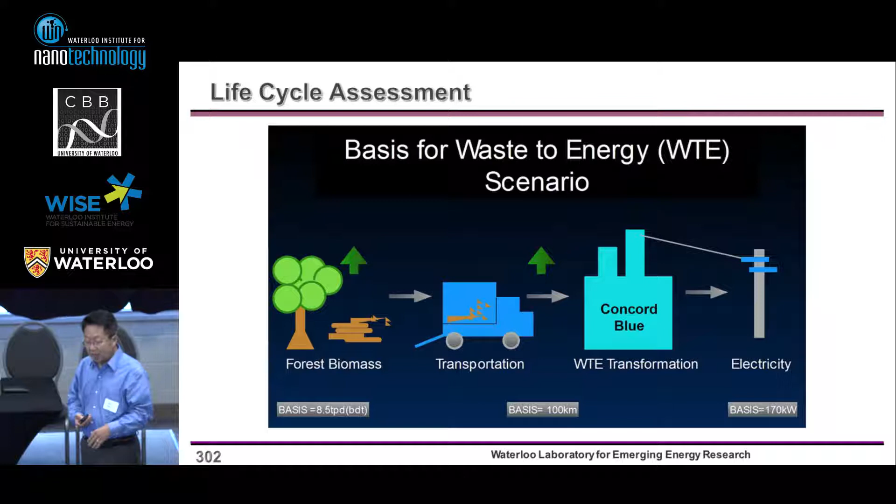Then we look at the different feedstocks for the process: wood residues, forest residues, and standing trees, and the fourth one is waste. For example, for that small location, we still have municipal waste, right? So those are 4 different samples we look at.

So the last one, actually I cannot go back. So we have some reasonable assessment about the cost and benefit in terms of energy and environment in these 6 locations. So the last topic is about smog.

We want to get rid of particulates from combustion of biofuels. Biofuels still have lots of carbon, then incomplete combustion produces lots of particles. In the air or exhaust, these particles become nucleates, and they absorb surrounding PAH large molecules that produce PM 2.5 or PM 10. So those are sources of particulate matter.

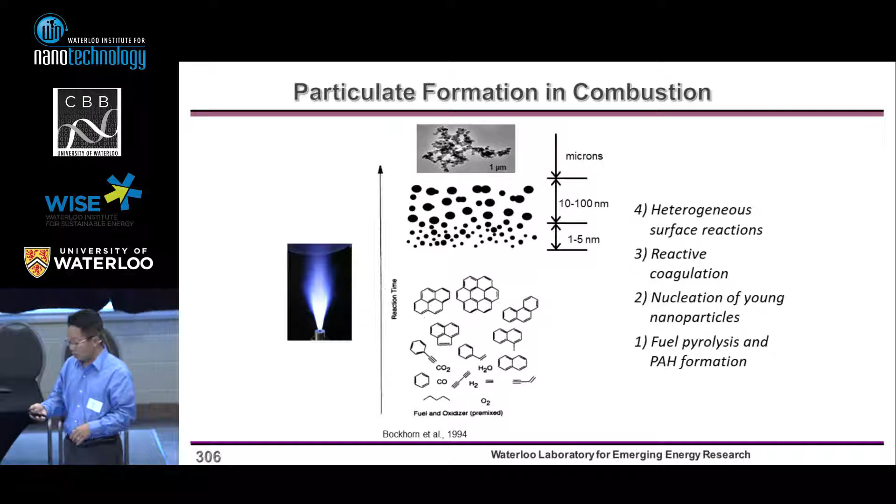So I'm not going to go through that test. We developed different catalysts in order to combust those particles under lower temperature. These are structures designed to generate lots of surface area in order to react the carbon nanoparticles better, and adjust the path for mass and heat transfer, to decrease temperature and enhance combustion efficiency.

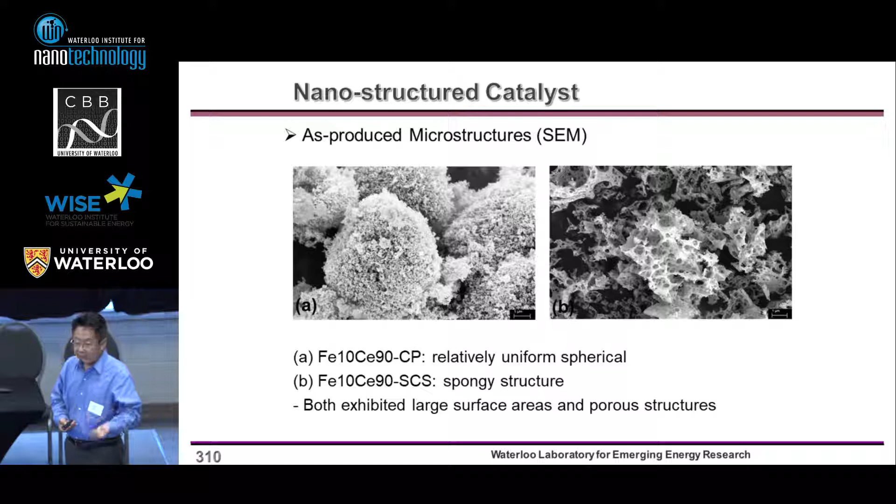I just want to show you one. Yeah, so how can I play those two different... You want to go back? No, I want to play the videos. Can I do it? Let me give you one.

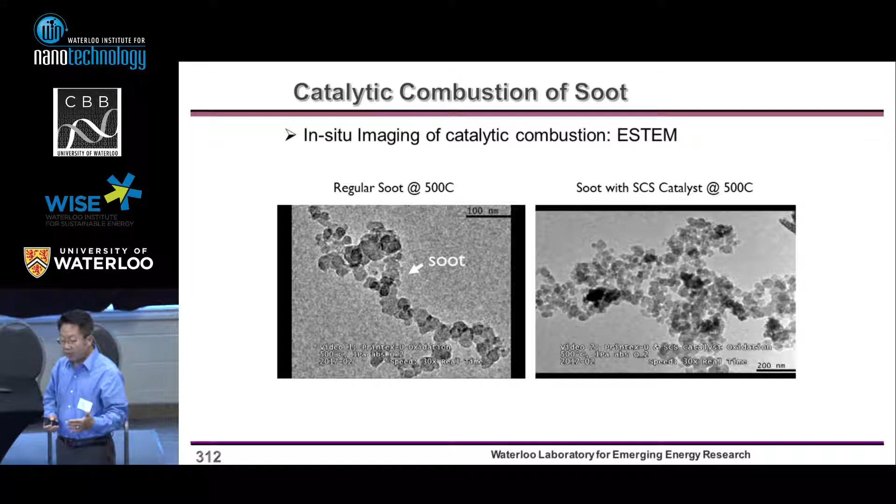So those are just a very straightforward demonstration for 2 different cases. The left image or video shows the soot at 500 degrees C. The right is the soot with catalyst at 500 degrees C. We put it into TEM, changed the environment, gave it a bit of 1 bar of oxygen, so that's ETEM, environmental TEM.

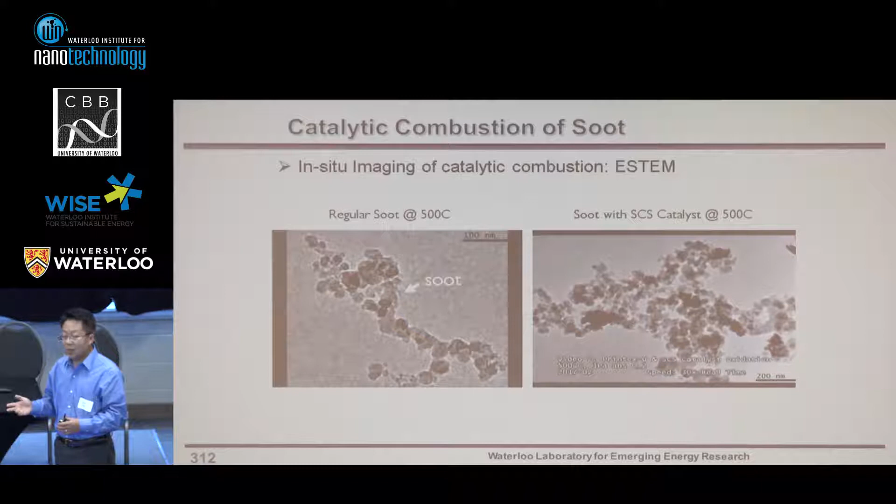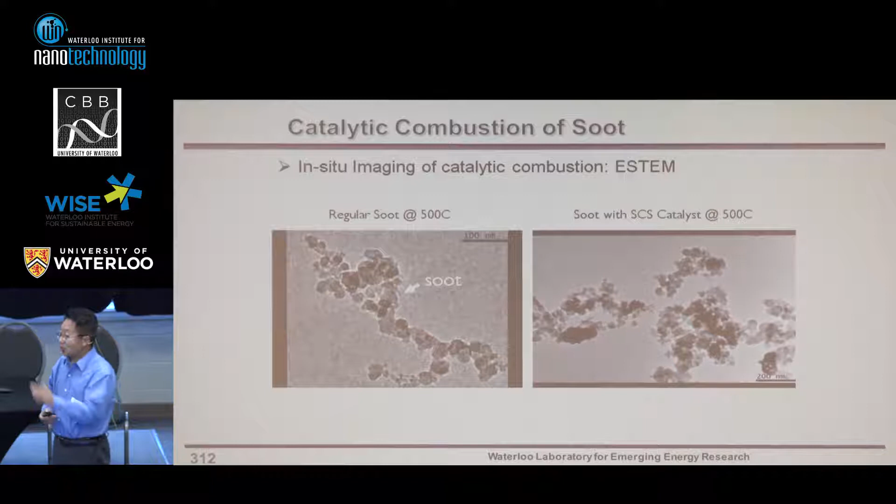Clearly you can see, at the same temperature with the catalyst, all those particles get eaten by those catalyst nanoparticles. The length bar there is 200 nanometers. But without catalyst, you cannot combust soot. This clearly demonstrates that with the help of a nano catalyst, we can get rid of these particulate matters from biodiesel combustion. Okay, I think I'm going to stop here. Thank you so much.